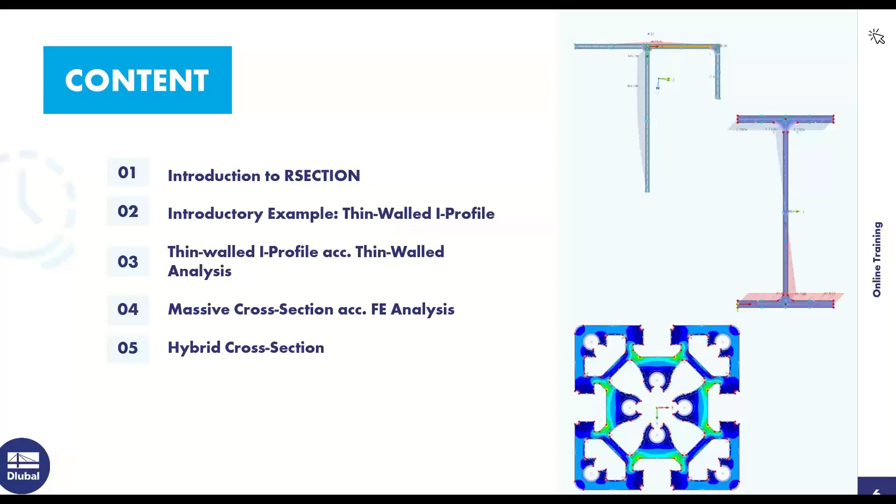Okay, then I will show you the RSECTION interface. RSECTION is an independently executable program for generating any thin-walled or massive cross-sections. If you want to design special cross-sections in RFEM or RSTAB that are not contained in the cross-section library, you can create them with RSECTION. You can then import these user-defined cross-sections into RFEM or RSTAB. In RSECTION, it's possible to calculate cross-section values and stresses.

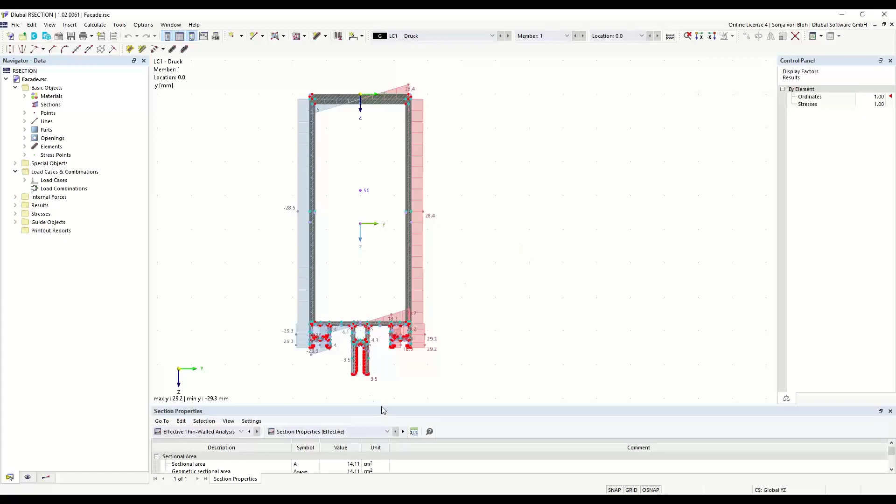The RSECTION user interface is the same as in RFEM 6 or RSTAB 9. The cross-section graphics and dialogs are displayed in the working window here. Most tasks can be performed with the mouse. In the table here at the bottom, the keyboard is primarily used for numeric input, and you will also find the output of the calculated results. Here on the left, you see 3 navigators: the Data navigator, the Display navigator, and the Results navigator.

The Data navigator manages the input data. If I open this tree here and double-click on an object, maybe here the points, it opens the corresponding dialog in which the selected object can be changed. However, it's also possible to create new objects. If you right-click on an object, you will find here the corresponding functions.

Then I will go to the Display navigator. The Display navigator controls the graphical display in the working window. If the checkbox in front of an entry is unchecked, this object is hidden in the graphic. If I uncheck the points here, then you will see the points are not displayed in the graphic anymore. Then I would show you the Results navigator. The Results navigator controls which results are displayed. You can switch here between ordinates, stresses, and so on.

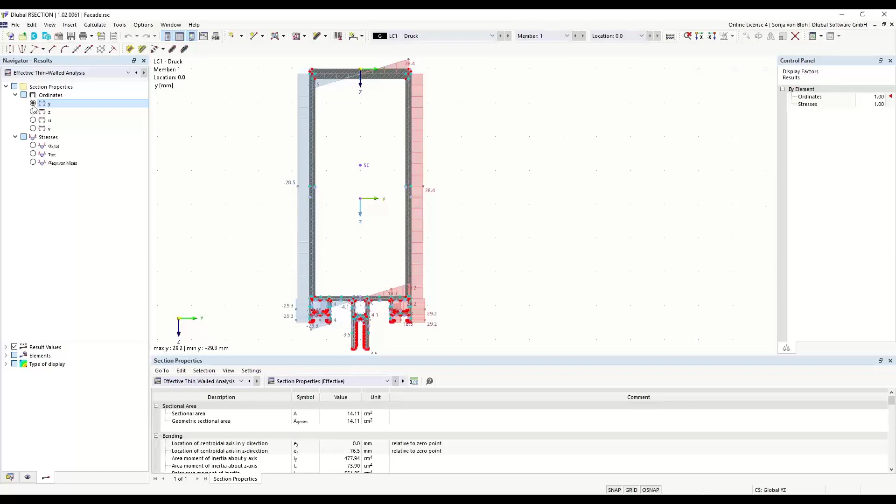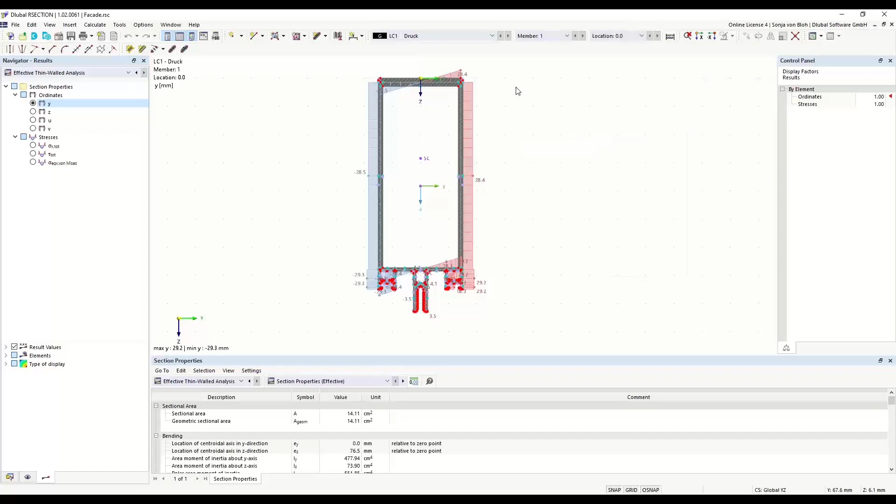Then I would like to go into the mouse functions. To move the section, you can hold down the mouse wheel and move the section accordingly. You can turn the mouse wheel to zoom in or to zoom out. Then you can right-click to open the context menu. You can also select objects with the mouse. If you open a window from left to right, everything that is completely within the selection area will be selected. Here, these objects were completely in the selection area, so they are now selected, which you can see here with this yellow color.

If you drag a window from right to left, everything that is intersected by the selection area will be selected. You can see here now that also this part is selected because it was intersected by this window.

You can also select individual objects. To do this, left click on the objects to be selected. Here I want to select this point, so I have to left click on it. And if I want to add another object to the selection, I have to hold down the Control key, and then you can see here the mouse pointer shows a plus, and then I can select the other object.

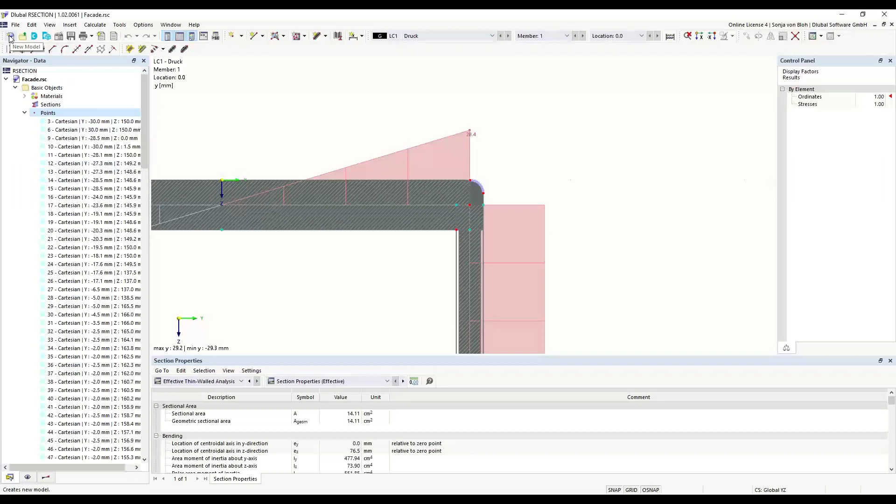This brings me to the first example. To create a custom cross-section, I have to create a new file, and I will do this via this button, New Model. And then I first have to enter the cross-section name, and I name it Example 1.

Furthermore, the analysis method must be defined. I have here two possibilities: the finite element analysis and the thin-walled analysis. I choose the thin-walled analysis in this case. The effective cross-section can be calculated for both analysis methods.

After activating the option effective section, the standard must be selected, and here several standards are implemented: Eurocode 3 Part 1.1, Eurocode 3 Part 1.3 for cold-formed sections, and Eurocode 9 for aluminum sections.

I choose this standard, Eurocode 3 Part 1.1, and according to the rules described in the standard, the subpanels are generated and the effective cross-section is calculated.

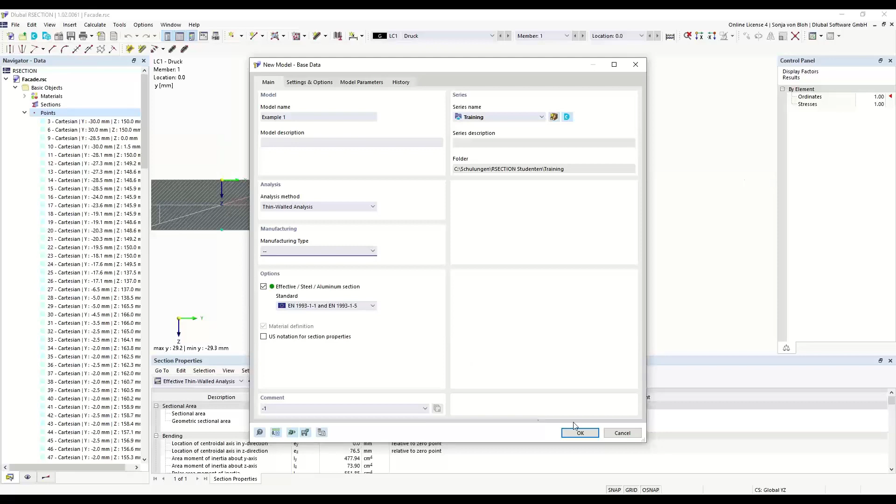In the steel add-on, the manufacturing type, which you can see here, determines which part of the standard is used for the design. For a cold-formed cross-section, the standard Eurocode 3 Part 1.3 is used, and for hot-rolled or welded sections, Eurocode 3 Part 1.1 is used. I don't define a manufacturing type in this case. Then I click on OK, and a new file will be created.

And first I define the material. Here already two materials are defined. If I double click on it, I open the Edit Material dialog. If no materials are defined, it's also possible to right click on Material and create a new material. Okay, I open this dialog again.

I can create a new material in the list via the button Create New Material, or it's also possible to copy selected materials. If I click on the button User-Defined Name, I can enter a name directly, and RSECTION, if I type in this name, lists all materials that match that name. But it's also possible to open the material library via this button, and I will do this in this case.

In the material library, filters are available on the left to quickly find the material. Here I can choose steel, then on the right all steel materials are listed. A search is also available, in which I can search for a material, and I search here for S355. Then I choose this standard and this material, and I click on OK.

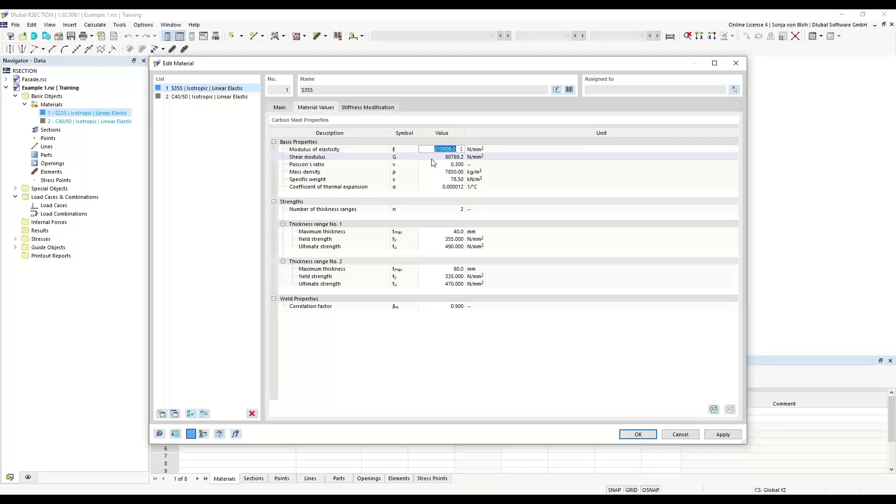If the material is not in the material library, I can create this material. If I activate the checkbox User-Defined Material, it's possible in the following tabs to define the properties that I want to use. I don't do this today, so I deactivate this option again, and then I click on OK.

I then create the elements. The definition of elements is required if the analysis method, analysis of thin-walled structures, is selected, or if the effective cross-section is to be calculated. An element must always lie in an area, and this area is called an RSECTION part.

Elements can be created graphically or via a dialog. The graphical input is called up via the symbols that you can find here. And the input via a dialog is called up via this navigator data. Here you can create a new element.

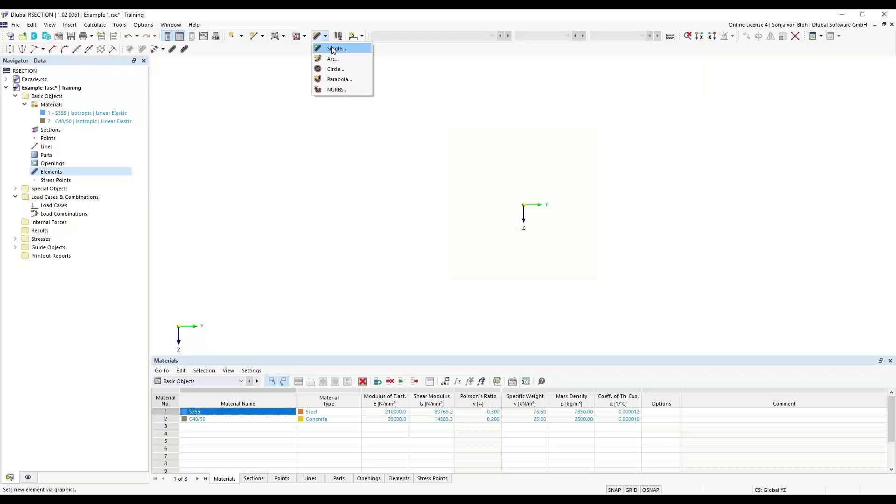When creating an element via the graphical input, the part is also created. When creating an element via the dialog box, the parts and the points of the element must be created beforehand. That's why I can't choose this dialog now, because I haven't created the points before. So I choose this function for the creation of elements. Here I choose single.

I enter the bottom flange here first, and for this I use the input mode length and direction, and here I define an angle of 0 degrees, a length of 150 millimeters and a thickness of 10.7 millimeters. Then I can insert this element in the working area graphically, or it's also possible to define here the point coordinates. I put this here on the coordinates 0, 0. And for this, I left click here in the working area.

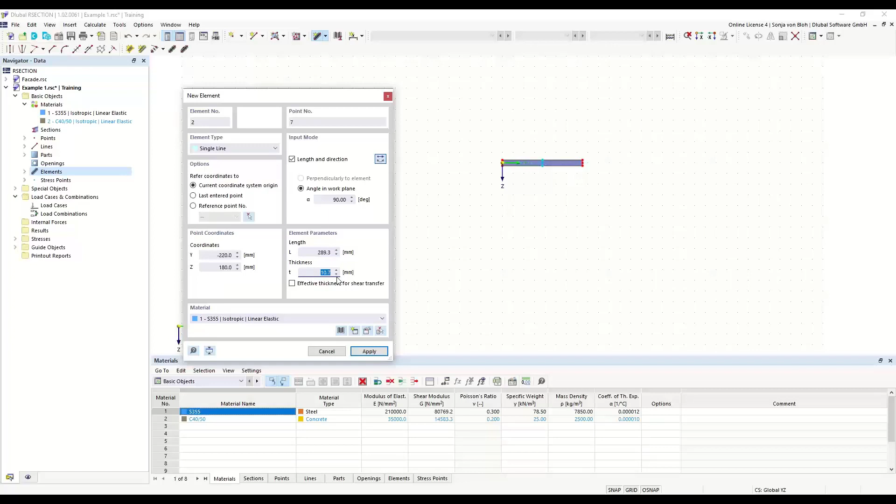Then I create the web. And for this, I use the input mode length and direction again. And here I define an angle of 90 degrees. And you can see here what's happening. And now I reverse the orientation. And I define here a length of 289.3 millimeters and a thickness of 7.1 millimeters. And then I left click here on this node.

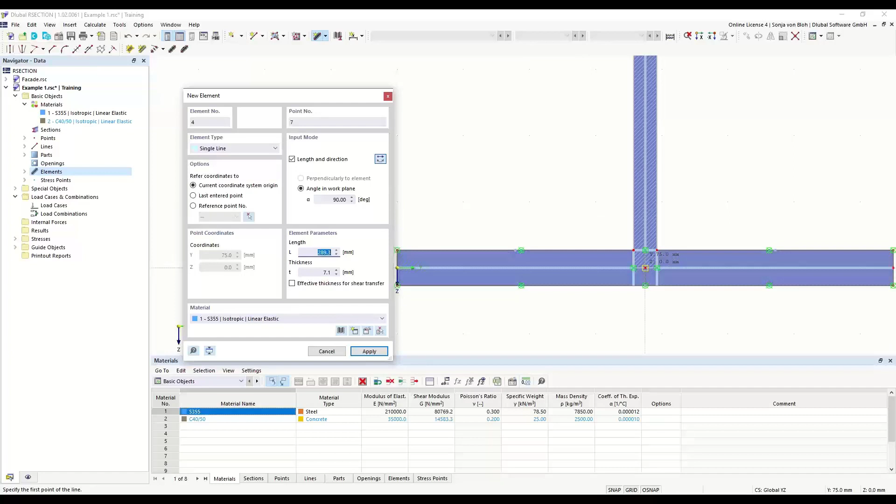Elements must be connected for the calculation of the effective cross-section. The connection is to be made via the start and end points of the elements. If two elements share the same points, they are connected. I have now here this element, and they share here this point, so they are connected.

Then I create the left flange. For this, I use here the length and direction input mode again. And here I define an angle of 0 degrees, a length of 75 millimeters and a thickness of 10.7 millimeters. And then I left click here on this point. Then I reverse the orientation again, and I left click on this point again. Okay.

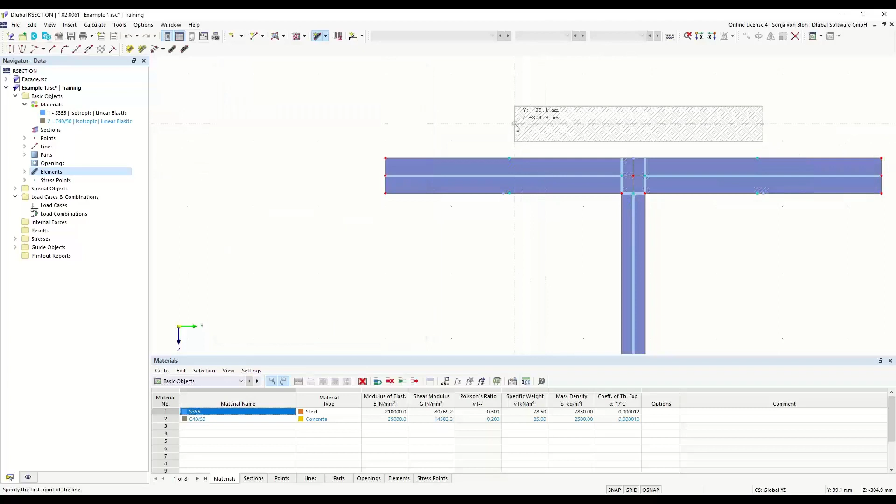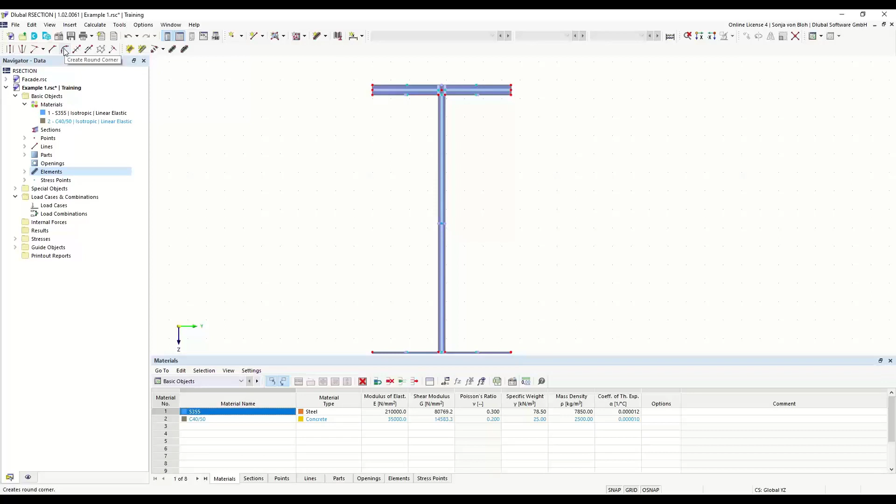The cross-section should be a rolled T cross-section to which a lower flange is welded. The round radius is 15 millimeters. I can define lines to create them or use a function that's called create round corners. I find this function here, create round corners, and I click on it, and then I define a round radius of 15 millimeters, and then I have to left click here on the corresponding lines. And if I right click, I close the dialog.

Then I have to define the welds. So for this, I use the function create angled corner. And here you have two corner types, both edges and edge and angle. And I choose here the edge and angle corner type. The lower flange is welded with a 6 millimeter double fillet weld.

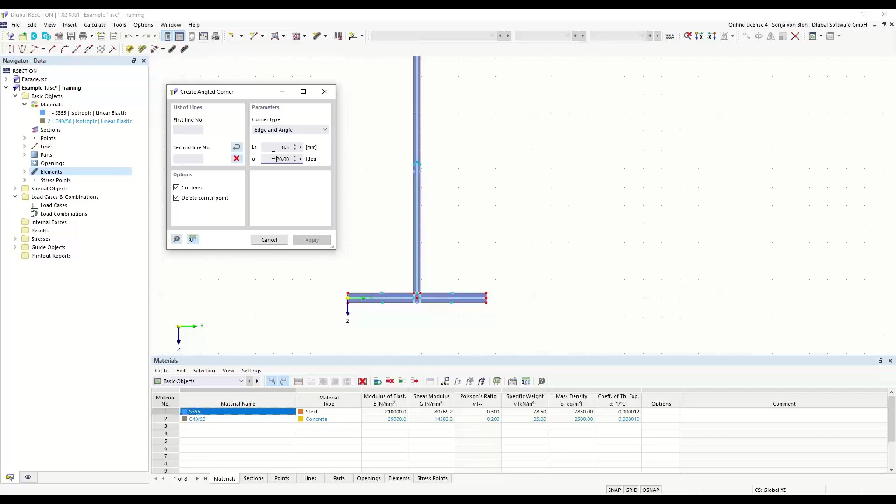I can type in here the length, or it's also possible to calculate it in this dialog. So I define here 6 multiplied by the square root of 2. And then I have to define the angle, and the angle is 45 degrees. Then I have to click on the corresponding lines. And now my welds are created.

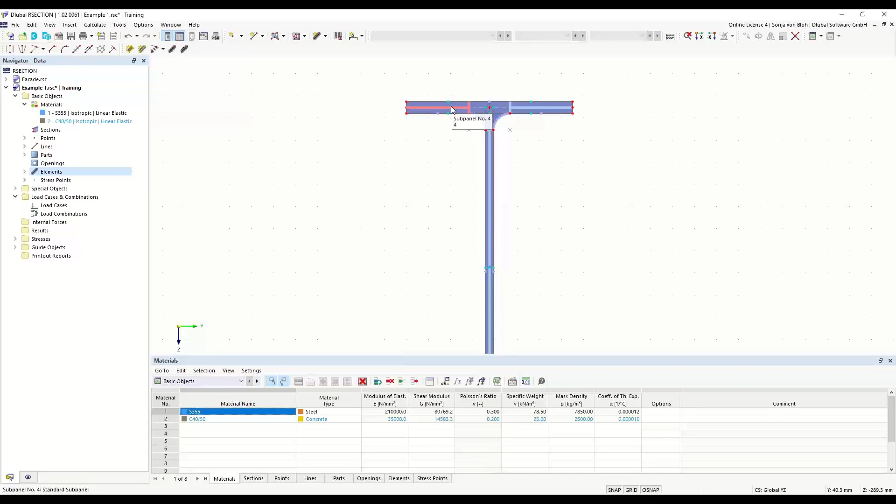What you can see here are the sub-panels, and these sub-panels are automatically generated based on the standard selected in the base data dialog, and these cannot be changed. If no elements are defined, the cross-section classification in RSECTION and the design in the design modules of RFEM or RSTAB is not possible. And it's also not possible to do a calculation of the effective cross-section if no elements and no sub-panels are defined. In the design add-ons of RFEM or RSTAB, like steel design, the cross-section is then designed according to cross-section class 3.

I would also like to use this example to show you how to calculate stresses and the effective cross-section. In order to calculate stresses or the effective cross-section, a load case must first be created. Load combinations can also be created, and I create a load case now. And I do this via the navigator data. For this, I right-click on the load case, and then I choose a new load case.

Then I can define a load case name if I want to, and I name it N, and then I create a second load case via this button here, create new load case, and I give the load case the name M. Then I define a load combination via this button. And here I assign these two load cases for the load combination. It's also possible to define here a factor if I want to. And here it's also possible to rename that load combination, and I name it N plus M. And then I click on OK.

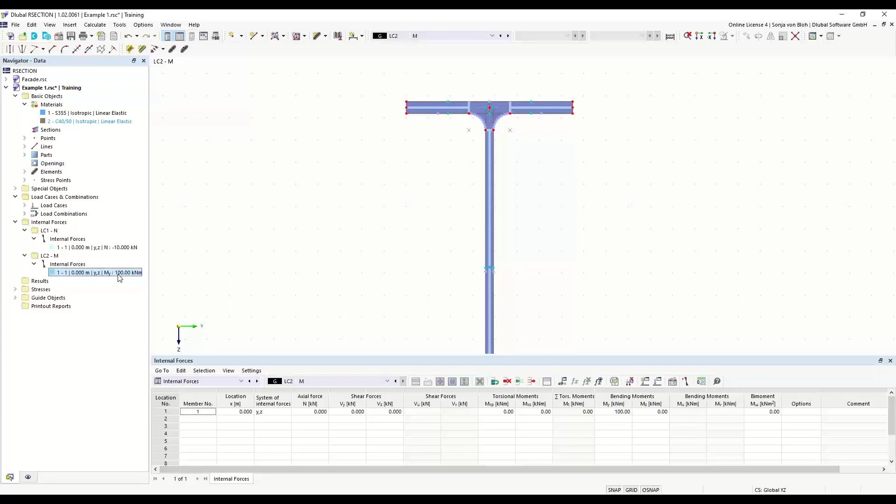Here I click on Apply and Next, and then I change the load case to load case number 2. And here I don't want to define an axial force, so I set it to 0, and I want to define a bending moment about the y-axis of 100 kilonewton meter, and then I click on OK. In the navigator data, you can now see that in load case 1 an axial force of minus 10 kilonewton is defined, and in load case number 2, a bending moment of 100 kilonewton meter is defined.

The blue dots that you can see here on the graphic are the stress points. Stresses are calculated and displayed at the stress points. The stress points are generated automatically. Stress points can also be defined manually, and I want to do that here. So I go to the navigator data again, and then I go to stress points. I right click on stress points and choose new stress point. Then I can define the point number if I want to.

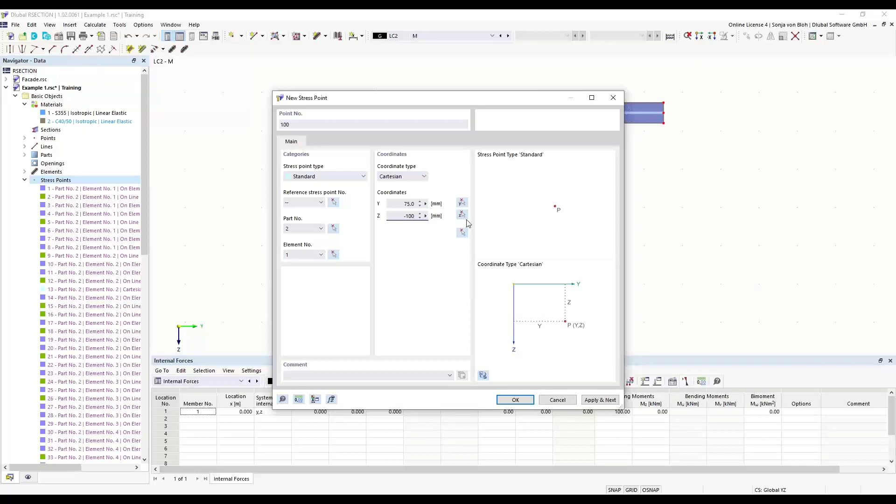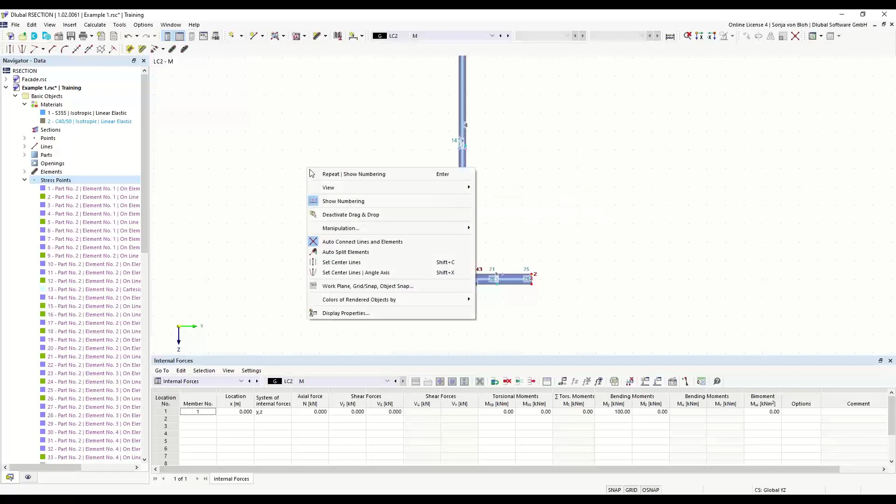I define here 100, and then I have to define the coordinates: Y 75 millimeter and Z minus 100 millimeter. And then I click on OK, and the stress point will be generated. You can see it if you go with your mouse over the stress point. It's also possible to show the numbering. You can right click here and choose show numbering. Then you can see, okay, this is stress point 100. I deactivate this numbering again.

It's also possible to show the numbering via the navigator display. Here you have this checkbox numbering, and here you can select or deselect the display of points, lines, and so on if you want to. Which stresses are to be calculated and output in tabular and graphical form can be set in the stress configuration. I will show you this now. For this, I go to the navigator data again, then to stresses, stress configuration, and I double click on the stress configuration, and the corresponding checkboxes are to be activated or deactivated here. If I click on this entry, then you get information on how the stress is calculated. Then I click here on OK.

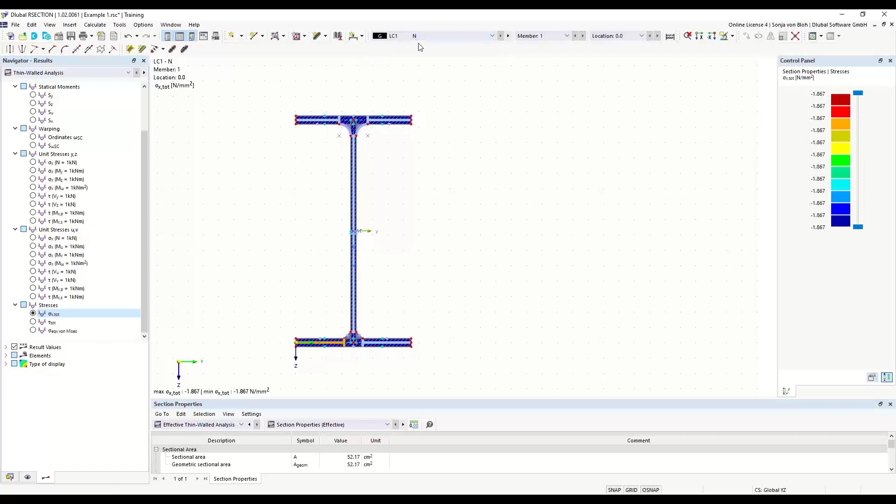I start the calculation now. And in the result navigator here, you can switch between the results of the gross cross-section. That's here the thin-walled analysis. I can show you here the stresses, and this is for load case number 2, and you can switch here also. You can see the stresses from load case number 1 or from the load combination. I choose here load case 1. There was an axial force defined, and it's also possible to change the type of display. Here I choose off.

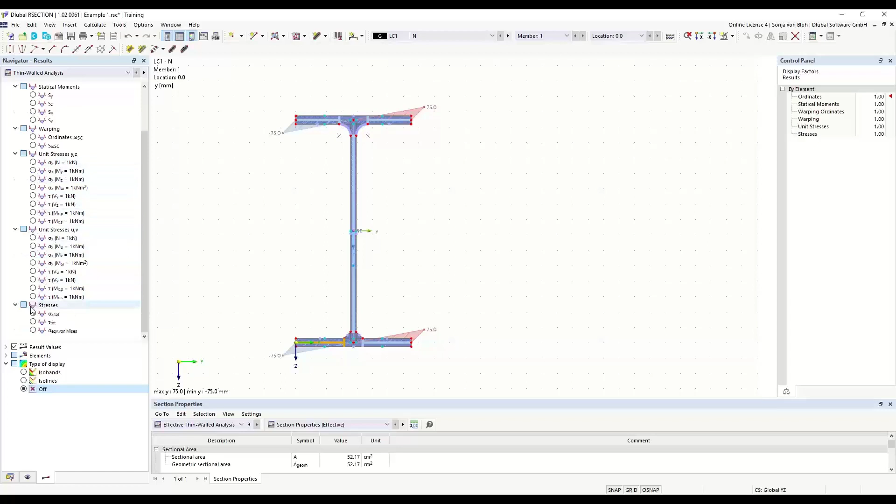It's also possible to show the different section properties. You can show the statical moments, or the ordinates, or unit stresses, or the stresses. Then it's also possible to show the effective thin-walled, the effective cross-section, and you can see in the graphic in the working window that this cross-section falls into class 4. Here this cross-section is reduced. According to the standard, the reduction in strength due to local buckling can be taken into account through effective width, and this is implemented in RSECTION. It's also possible to display or to control the section properties in numerical form.

For this, you have here also the possibility to show the section properties of the gross cross-section. For this, you have to choose thin wall analysis, and then you have the possibility to show the section properties via this drop down. Here you can see the sectional area calculated for the cross-section, and the area moment of inertia about the y-axis and z-axis and so on.

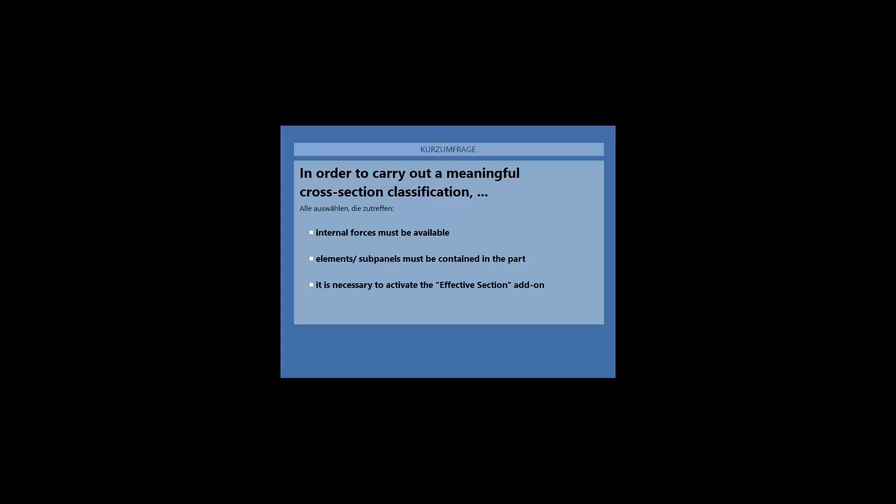Okay, I will now show you the results. For a classification, internal forces must be defined, elements must be defined, and it's necessary to activate the effective section add-on.

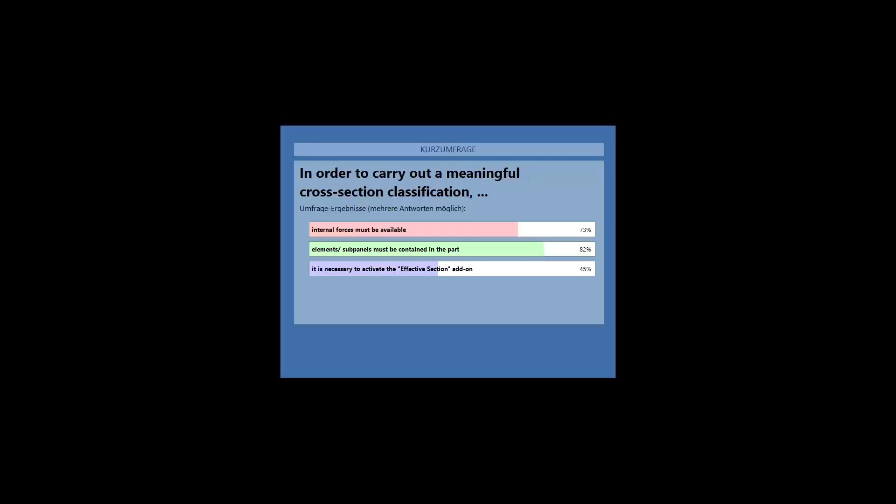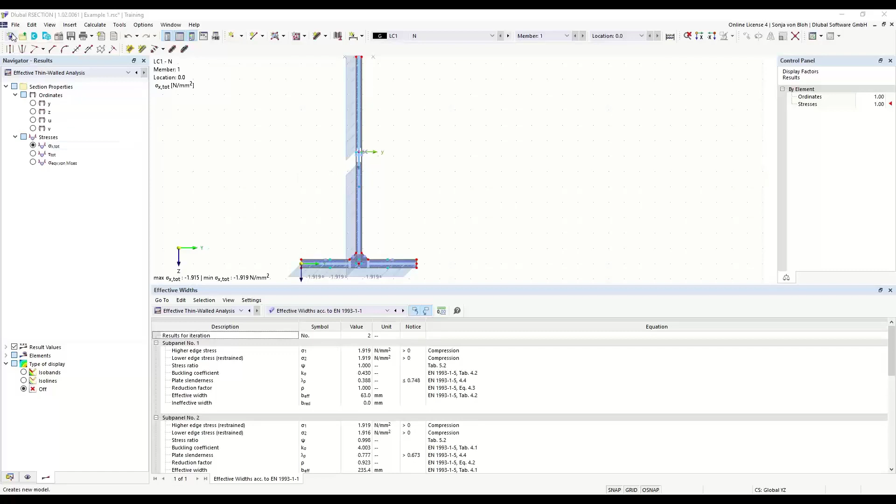Okay, I would now like to use another example to show you how you can access cross-sections from the library and modify them. For this, I create a new file. I click here on new file and name it example 2.

I choose the analysis method thin wall analysis, and I choose here also the option effective section and the standard EC3 part 1.1. And I click on OK.

I define the material first. For this, I modify this material.

This is the material that I wanted to use, but I show you the material library again. I can click on this button, import from material library, and then I search for the material that I want to use. It's an S235. I choose this material, click on OK, and OK.

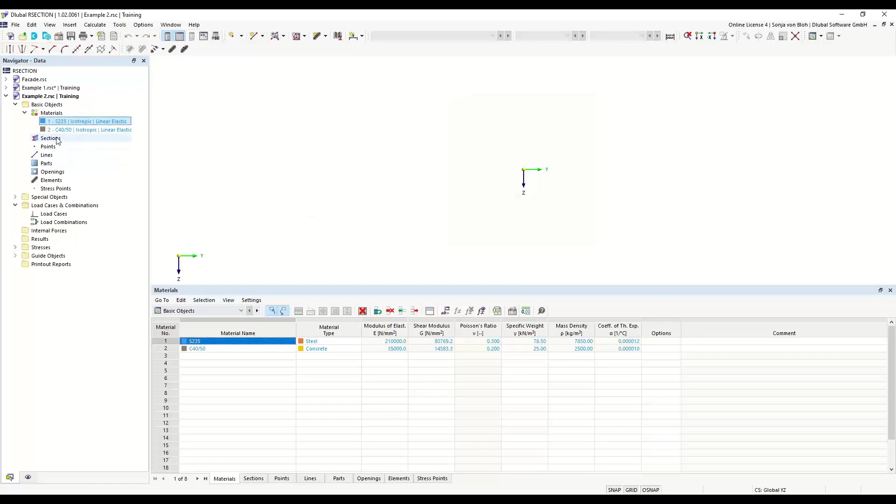And then I insert a cross-section from the cross-section library. To do this, I right-click here in Navigator on the tree section and choose New Section.

The window is structured like the material window. A cross-section can be created here via this button, Create New Cross-Section. It's also possible to copy a selected section, and also possible to type in here the name of the cross-section.

Maybe here IPE 200. And then all cross-sections that match with the name are listed here in the list. It's also possible to open the cross-section library via this button here, Import Section from Library.

And then I have to select the section from the library. And here I choose the L section. Here again, the cross-section library is structured in the same way like the material library.

You have here filters on the left, where you can filter by manufacturer, for example. And it's also possible to search for a cross-section.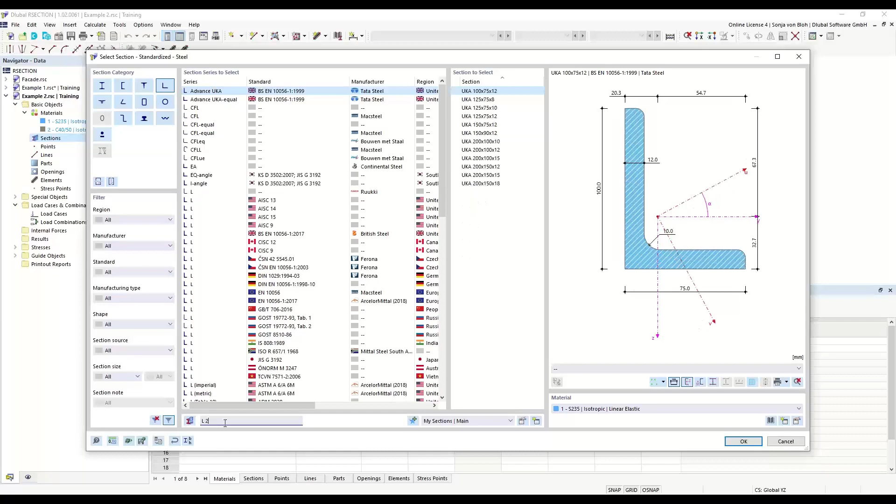And here I type in L 200, 150, 200 - 0 was missing, 150, and 12. And here I choose this standard, and then this section, and I click on OK.

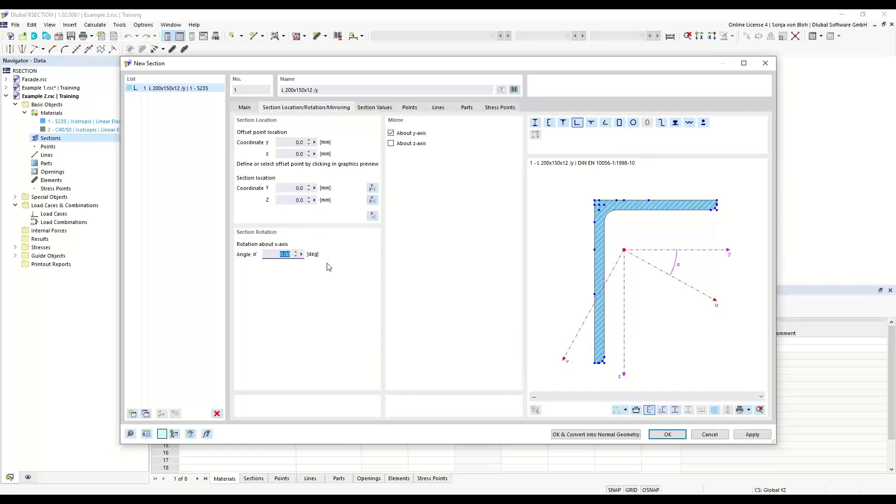The angle should be mirrored around the y-axis. So I activate the checkbox about y-axis, and the section should be rotated by 90 degrees. So I type in here 90 degrees.

Furthermore, I select here the offset point in the graphic, and this is this point. At this point, the cross-section is placed at the insertion point, and the insertion point I can define manually here in these boxes, or it's also possible to pick this in the working window. I will do this. I pick here the 0, 0, and then I click on OK.

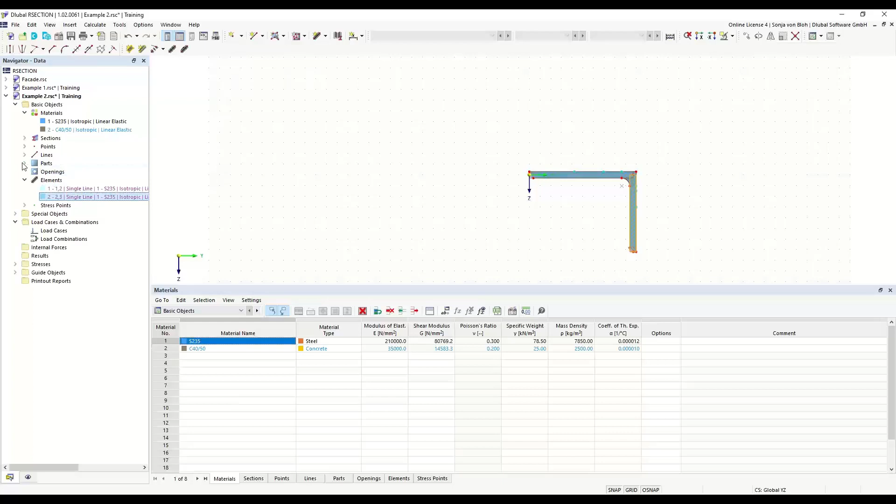When inserting this thin-walled cross-section, here 2 elements were defined, and also the part. The cross-section can be subsequently edited.

If I double-click on this cross-section, I open the Edit Section window, and here I can change the section location or the mirroring, and I can also change here the cross-section. I can import another cross-section from the library.

It's also possible to move or mirror this cross-section via these functions: move, copy, or mirror. However, in order to modify individual objects, such as points or lines, the cross-section must be split.

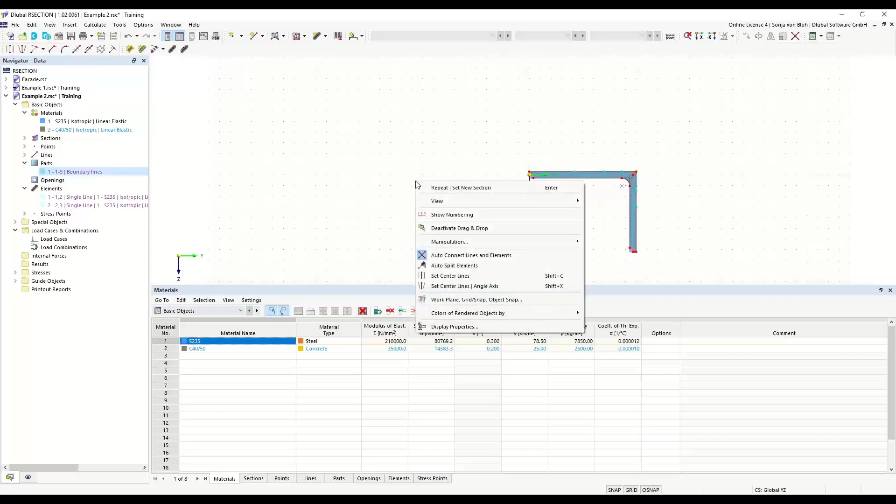The cross-section is to be supplemented by further cross-section parts. I therefore split the cross-section into its individual parts for further processing. And for doing this, I first deactivate here this function auto-split element.

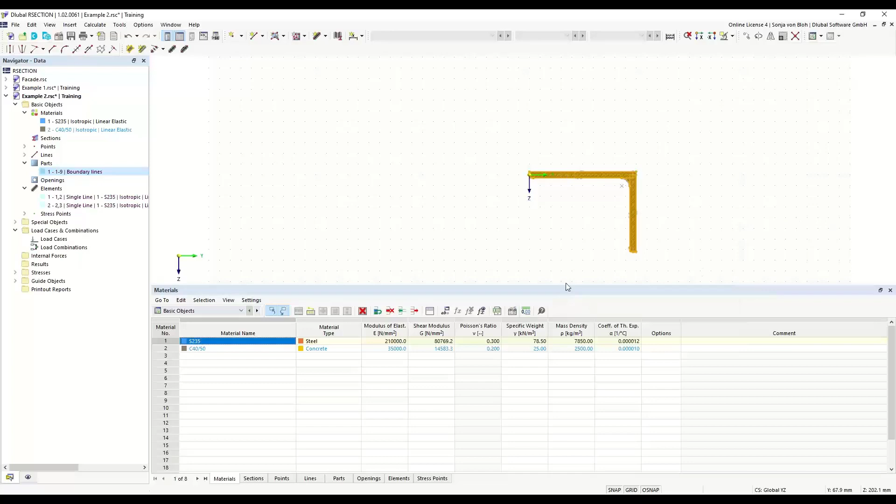And then I right-click on the section and choose here the function convert into normal geometry. Now this cross-section is split into its objects, and the fillet isn't needed,

so I delete this point, and with deleting this point, the fillet is also deleted. And now you can see that the elements are colored in red. And this red color says, okay, there's something wrong.

Here the part is missing. You can see the part was also deleted and elements must lie in a part. So now these elements are shown in red.

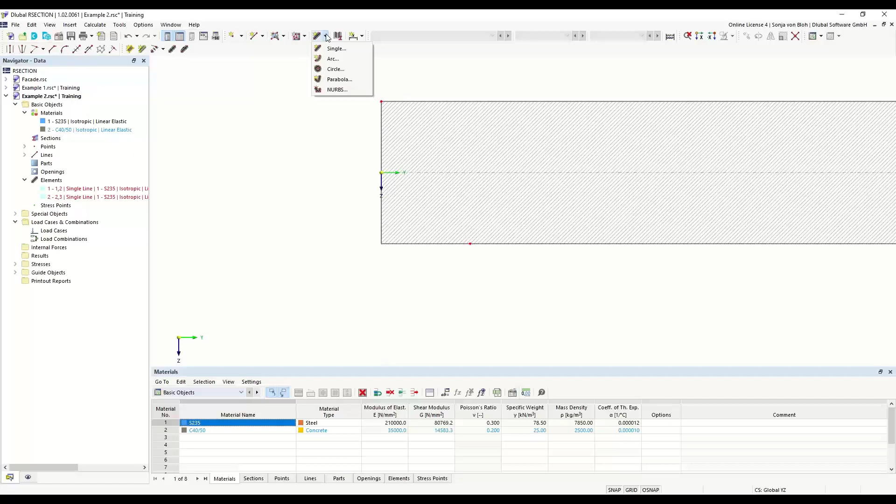I also add more elements via the graphical input. I choose single, and use the input mode length and direction again. Here I define an angle of 0 degrees, a length of 200 millimeters and a thickness of 12 millimeters. I want to place this here, so I have to reverse the orientation, and then left click here in this working window.

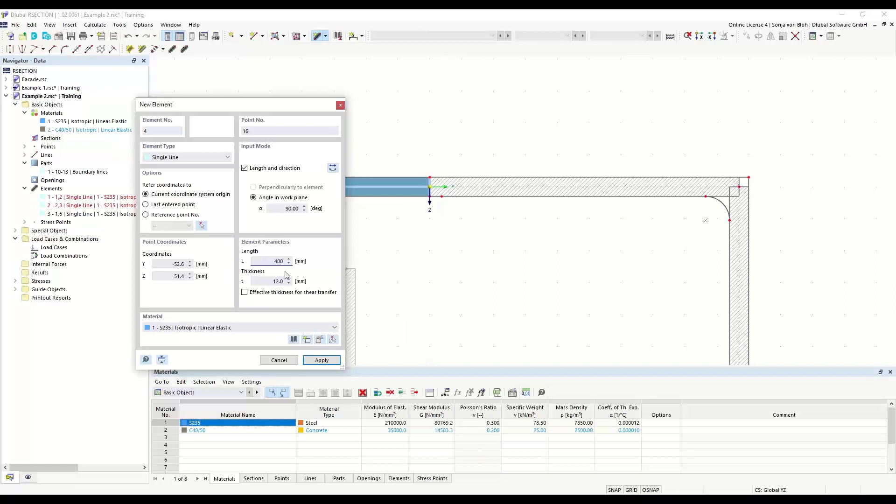Then I add another element with an angle in the work plane of 90 degrees. I have to reverse the orientation again, so I click on this button. Then I define a length of 400 millimeters and a thickness of 12 millimeters, and left click on this point. Then I right click so that this window is closed, and I don't need these lines here.

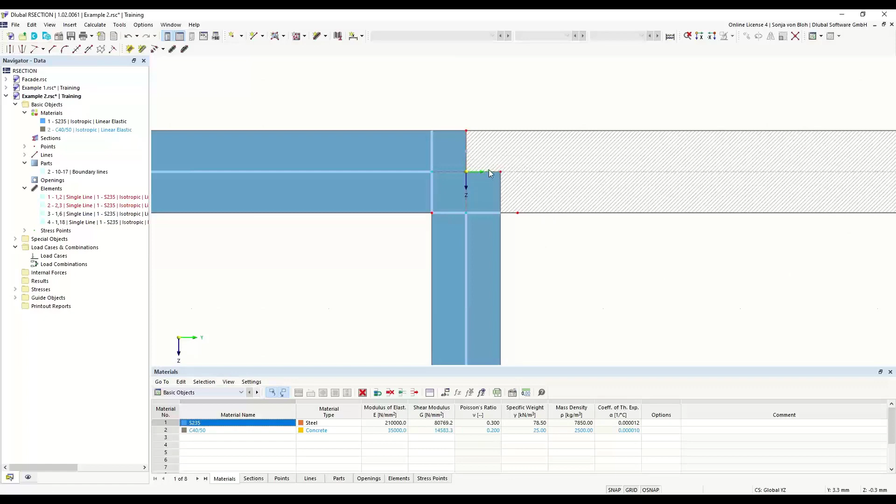So I delete them. I press the delete button. I do this for this line also. Press on delete.

Welding seams should also be taken into account in the cross-section properties, and I create the weld seams using the angle corner function that I've shown you before in another example. So I click on the button create angled corner. I use the corner type edge and angle again, and here a 6 millimeter double fillet weld is to be defined, so I define 6 multiplied by square root of 2, and an angle of 45 degrees, and then I click on the corresponding lines.

Furthermore, I still have to create the part by selecting the relevant lines, and for this I use the function you can find here, select boundary. Here I have to define the material for the part, then I click OK, and then I click on the line, and the part is created. What you can see here, now the red color for the elements is gone, because now the part necessary for the elements is created.

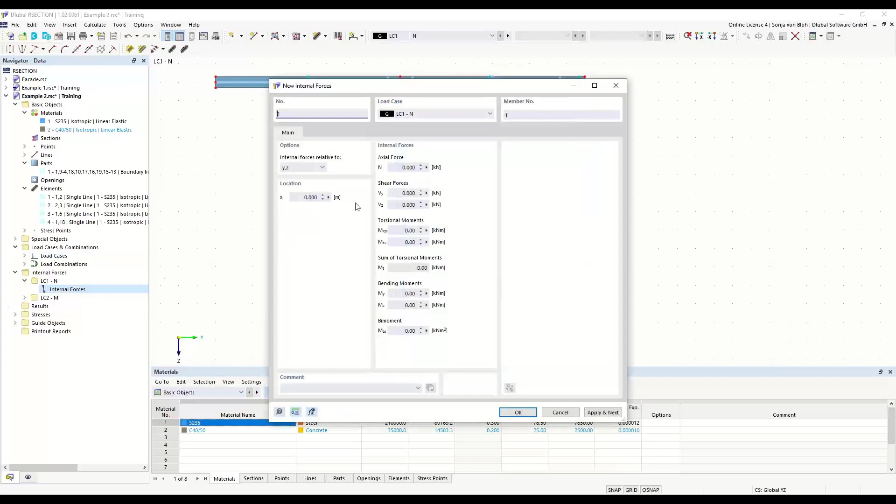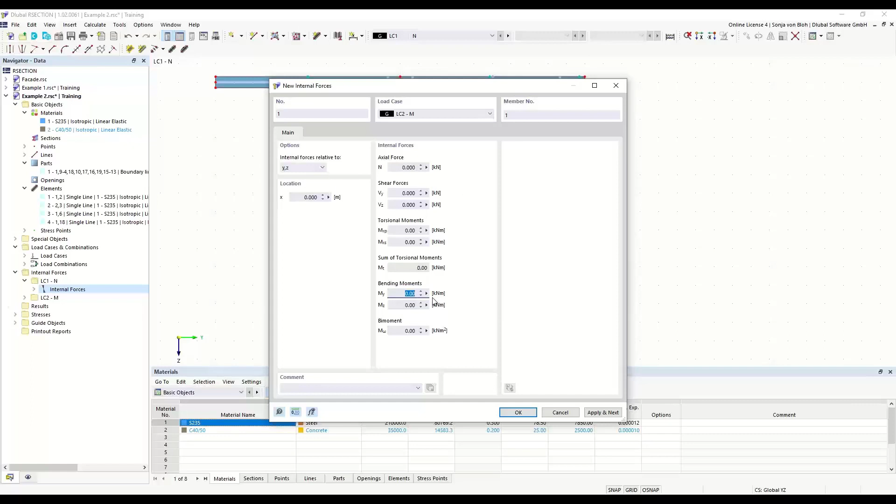Then I have to define the internal forces. For this, I double click on internal forces, and define an axial force of minus 50 kilonewton for load case N. Apply and next. Then I change to load case 2, and define an axial force of 0 kilonewton and a bending moment of 20 kilonewton meter. Click OK. I start the calculation now.

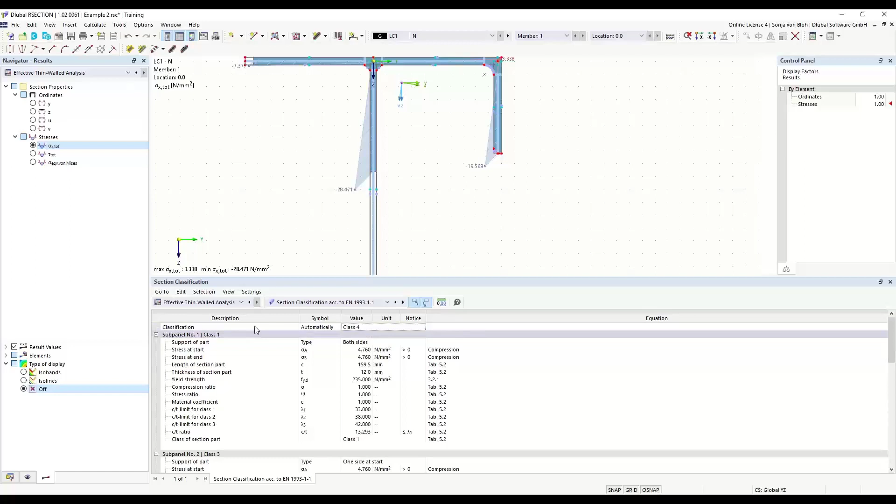I can see here the effective cross-section. I change the type of display to off, and I want to see the stresses. And I see now the reduction due to the class 4 cross-section. I can control this in numerical form, section classification - okay, it's class 4. And I can see here also the calculated reduction.

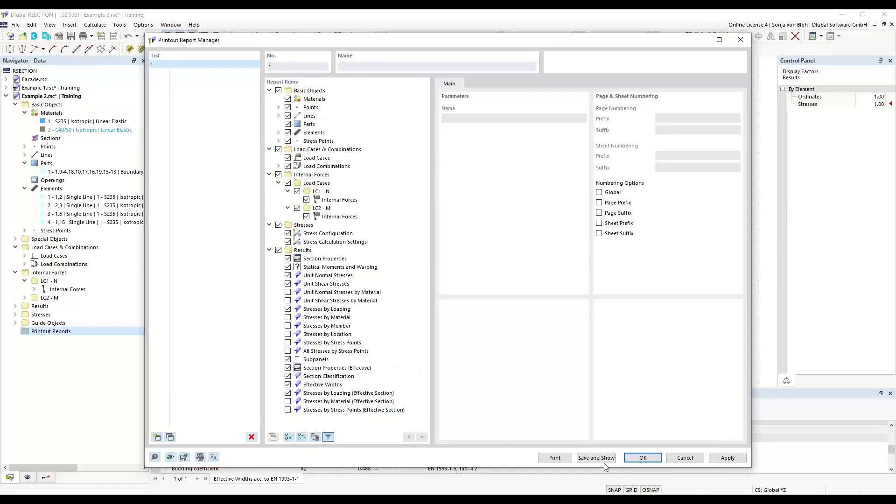I want to create a printout for the documentation, so I go to Navigator Data again. Then I right-click on the printout report and choose New Printout Report. Then I can choose the report items. I don't want to have the stresses by material, by member, location, stress points, or stresses by stress points here. And I don't want to see the stresses by loading and material here. Then I click Save and Show, and the printout will be generated.

You can see it here. It's also possible to add a graphic to this printout. For this, I go to this button here, print graphics to the printout, and maybe I can change the representation a little bit. Maybe I can add all values, and I want to tilt the result diagram into the work plane.

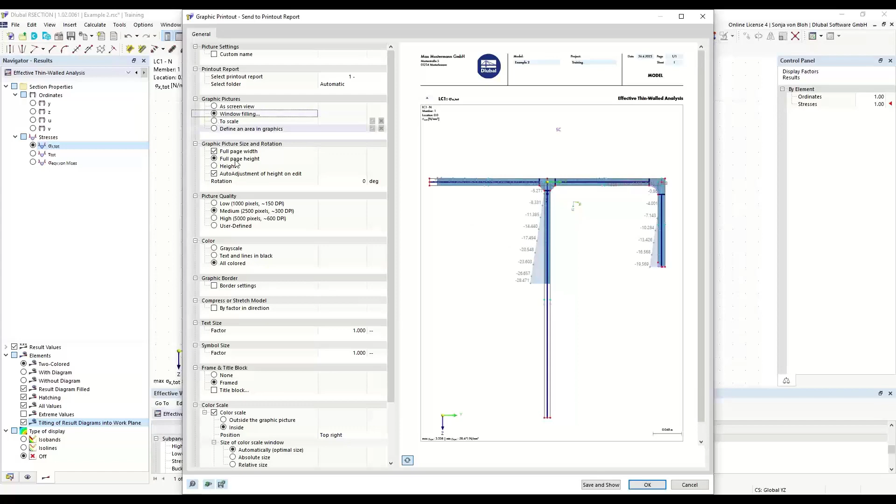And then I choose print graphics to the printout report again. Here it's also possible to influence the size of the picture. I can choose window filling, then it's much bigger. Then I click Save and Show, and this graphic will be added to the printout.

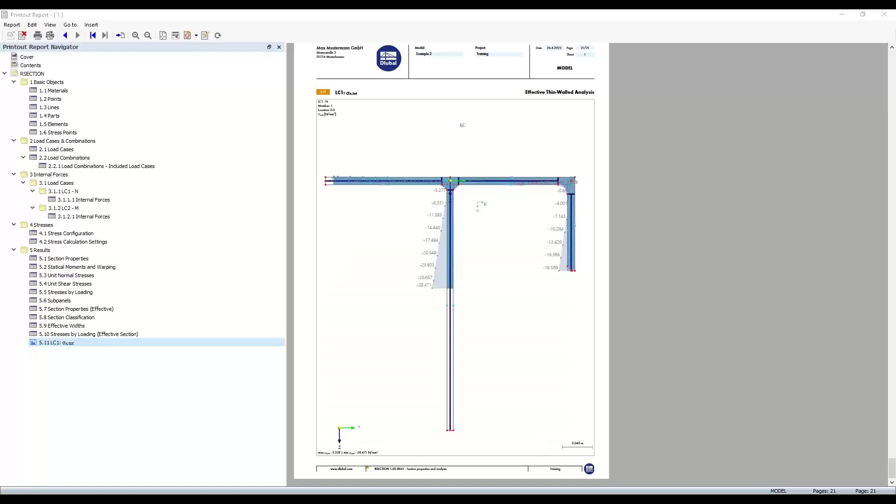In my first example, I show my screen again, and I close the printout report, and go to my first example again. I forgot to show you how to display the stresses on certain stress points.

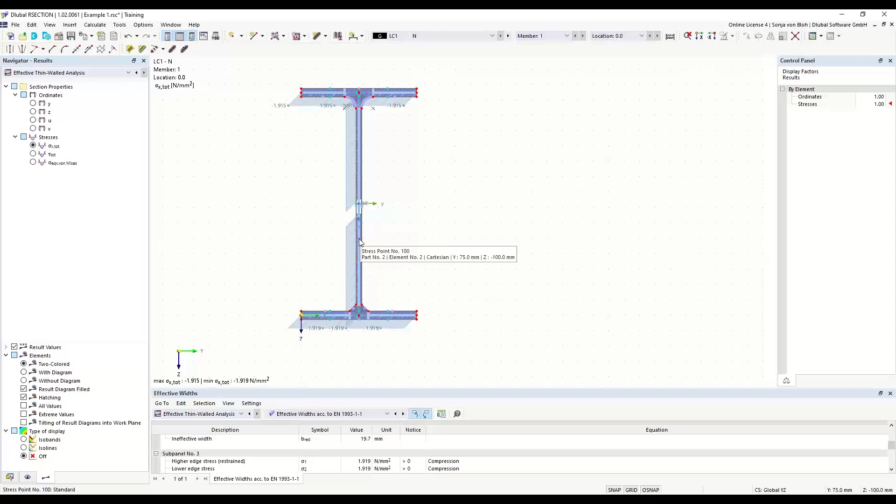For this, you remember we have created stress point number 100, and if you want to see the stresses on stress point number 100 in the table, you have to choose the table stresses, then click onto the stress point, and now you see the stresses here on this stress point. I forgot to show you this.

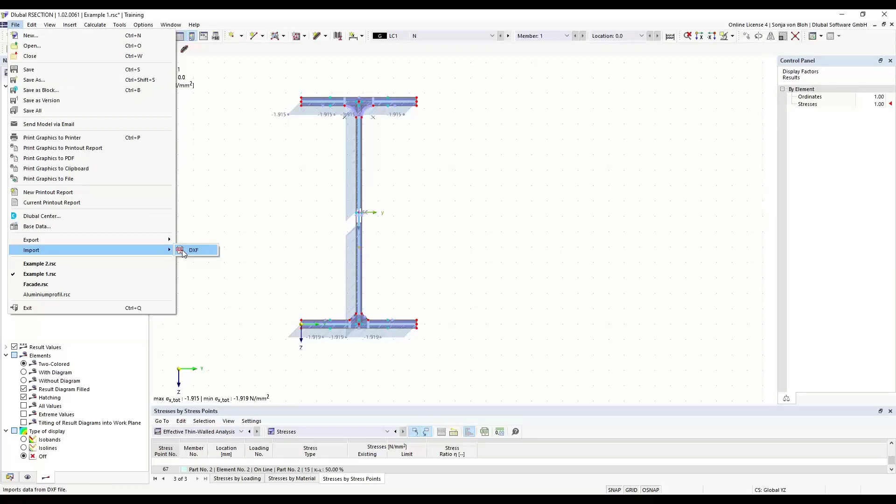In the next example, I would like to show you that you can also create cross-sections by importing a DXF file. A DXF file can be imported via menu File, Import DXF. Then you have to choose the corresponding DXF file and click on Open.

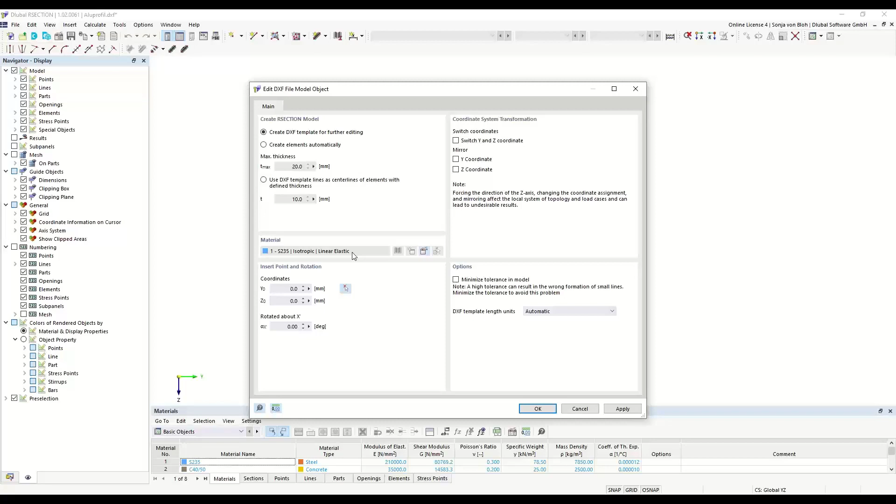The function 'create DXF template' is useful for massive cross-sections where no elements need to be created. It can also be used for complex cross-sections where I only want to create elements for the decisive cross-section parts. With this import function, the lines in the DXF file are imported as lines.

I use this function now, so I click on OK, and now the cross-section is imported.

First I define the material for this cross-section. I go to the Navigator data again, click on materials, double click on this material, and I want to choose an aluminum material from the material library.

I open the material library again, and then I can choose aluminum, and here I search for EN 6060, and then I choose this material and click on OK.

I open the base data, and here I have to choose the analysis method, and a finite element analysis is to be carried out for this cross-section. So I choose here the finite element analysis.

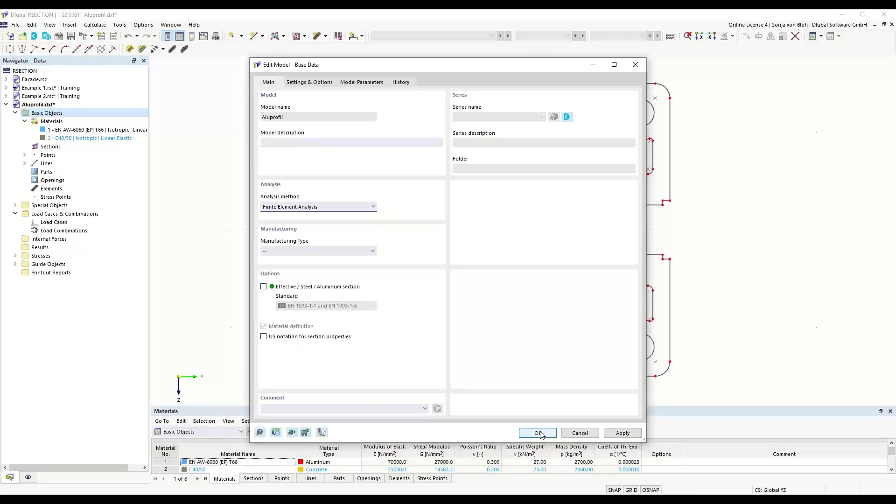Finite element analysis should be performed on massive cross-sections such as timber or concrete cross-sections, in contrast to thin-walled cross-sections, where the stresses can be regarded as constant across the cross-section thickness. The stress distribution in massive cross-sections is variable, and this can only be determined with a finite element analysis. So I choose this analysis method and click on OK.

In a finite element analysis, only a part needs to be defined. It's not necessary to define elements. So I define now this part, and for this I use the function select boundary.

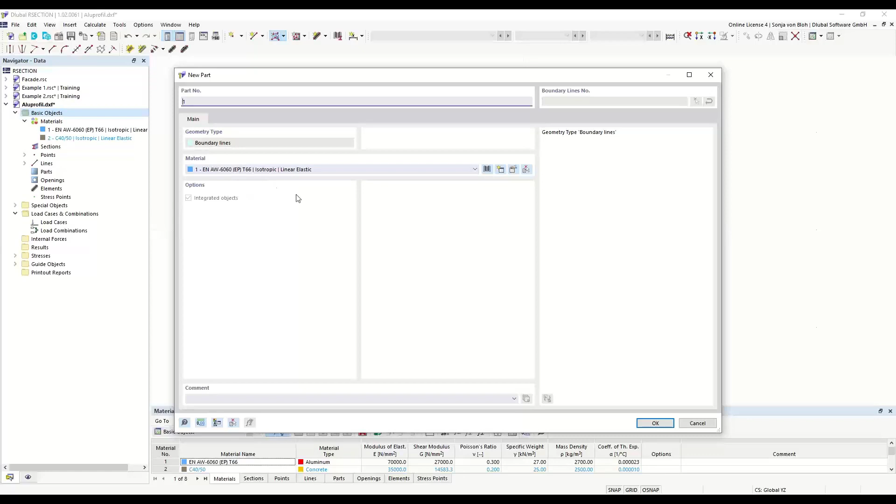Then I choose here the material EN AW 6060, click on OK, then I choose the line, and the part will be created.

After creating the part, I still need to create the openings. I use also here the function select boundary for openings, and then I choose the corresponding lines.

I want to show you that you can also create openings with the function rotating. So I now select the opening that I want to rotate and copy, and then I select the function rotate selected objects.

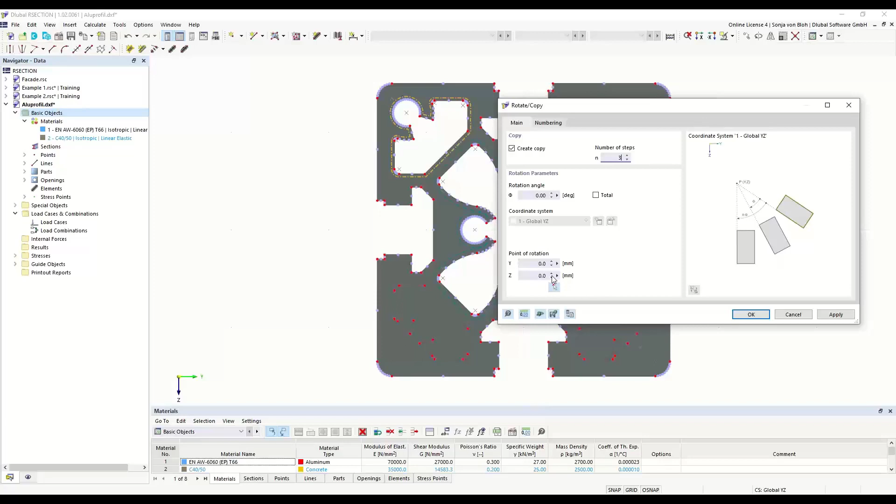Because I want to create this opening, I activate the checkbox create copy. I want to have 3 copies, and then I have to define the point of rotation. I can pick it in the work window, and then I click on OK.

Sorry, I forgot to define the rotation angle. This should be 90 degrees. And then I click on OK.

Now the openings are created. I want to calculate the stresses here as well.

So I create a load case, new load case, and I name it N plus MT. Then I click here on OK.

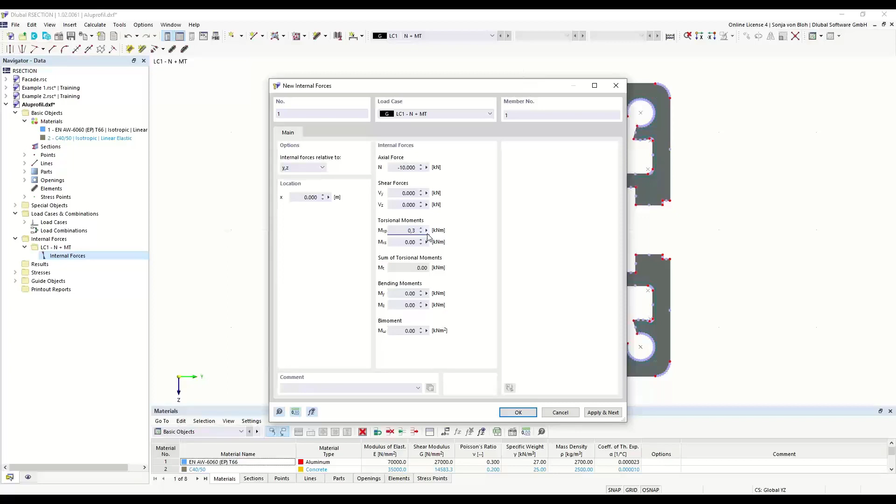Then I have to define the internal forces. Here I define a compressive force of minus 10 kilonewton, and here I define a torsional moment of about 0.3 kilonewton meter. And I click here on OK.

And then I start the calculation.

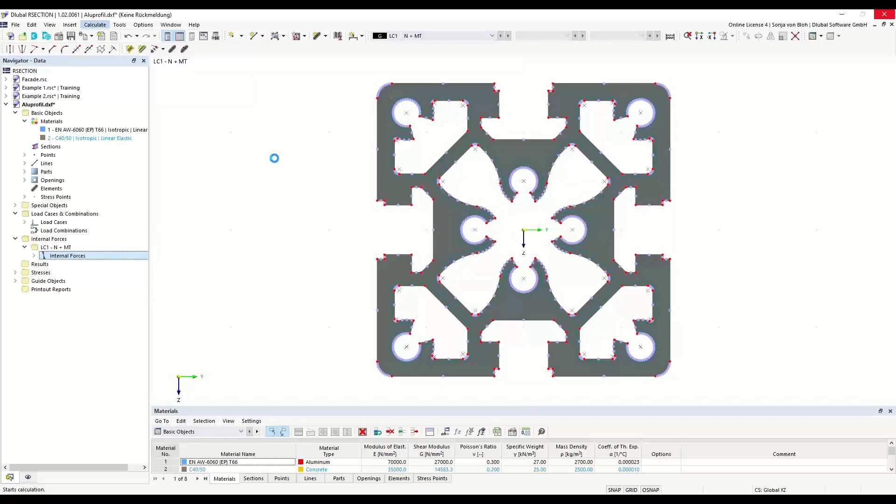Here in the navigator results, I have only the results of the finite element analysis. Here I choose the stresses, the equivalent stresses. And you can see now the graphical results in the working window.

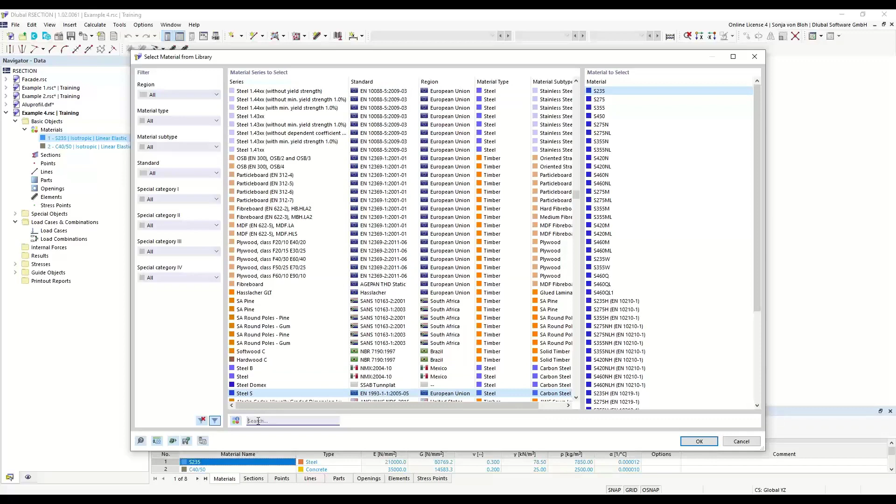Then I have to define the materials. For this I modify the first material, and here I open the material library again, and I want to use a steel material S235. So I choose this material, and for the second material, if you don't have one, I will delete it.

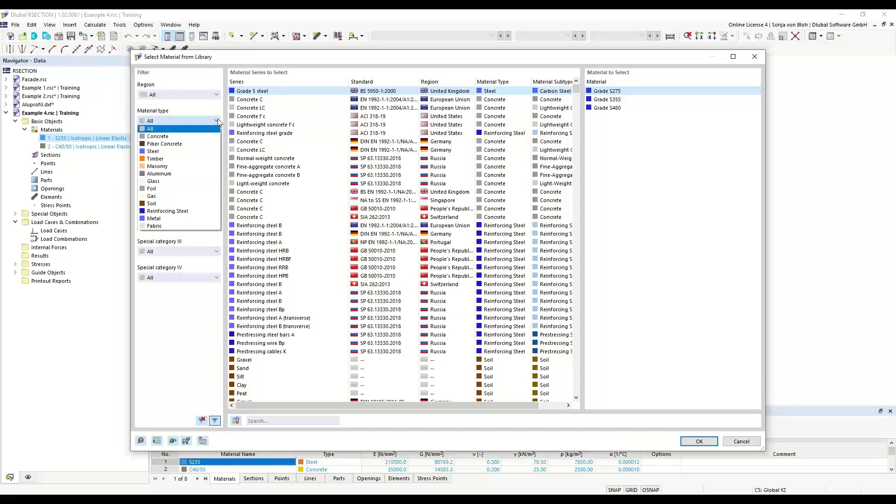If you don't have one, you can create it via this button, create new material, and then you can go to the material library, and then you can choose here concrete for material type, and then I choose here C40/50. I click on OK and OK.

A 1000 millimeter wide and 200 millimeter high concrete cross-section lying on an HEB steel cross-section is to be modeled. So I model the concrete cross-section. For this, I use here this function single element. I use the input mode length and direction,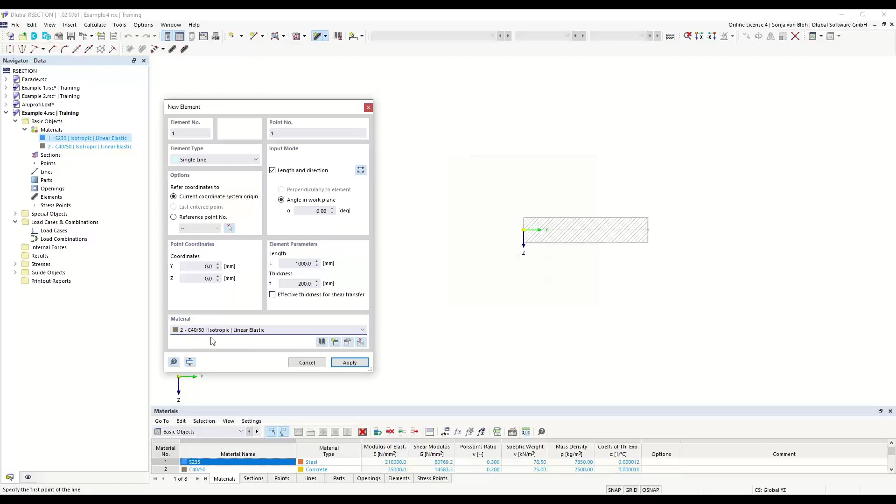and I define here a length of 1000 millimeters and a thickness of 200 millimeters, and I choose here the material 2, the concrete material, and then I add this here in the working window with right click. I close the window, and then I select HEB 400 from the cross-section library. To do this, I right-click here on Section, New Section.

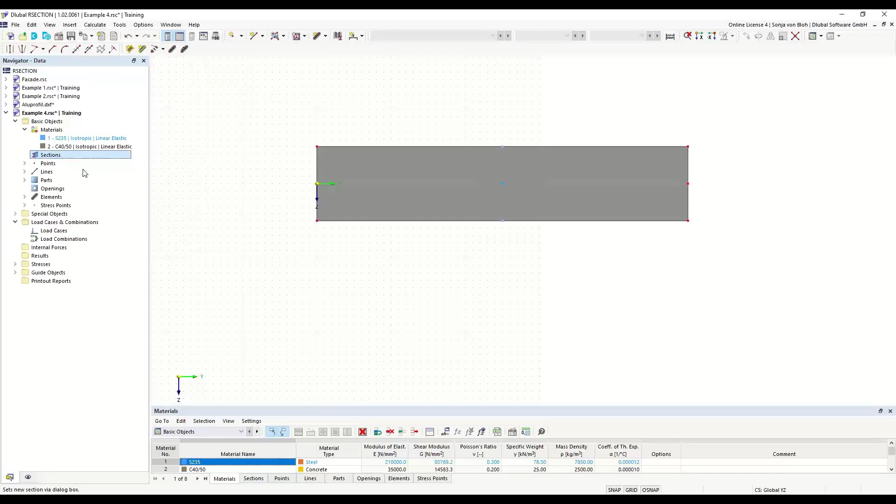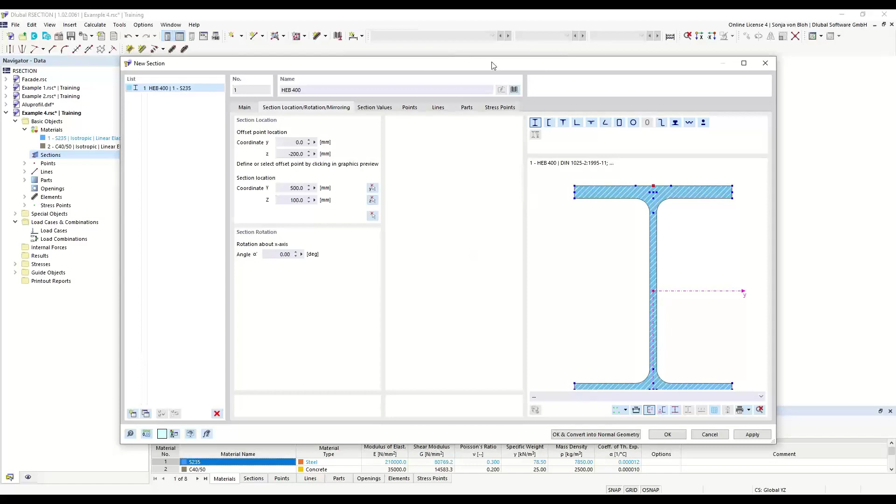I open the section library, choose here I-beams, H-beams, and then I type in HEB. Here I want to use this cross-section, and I choose here the material, the steel material number 1, S235. Click on OK. Then I pick here this point, and I pick here this location, and then I click on OK.

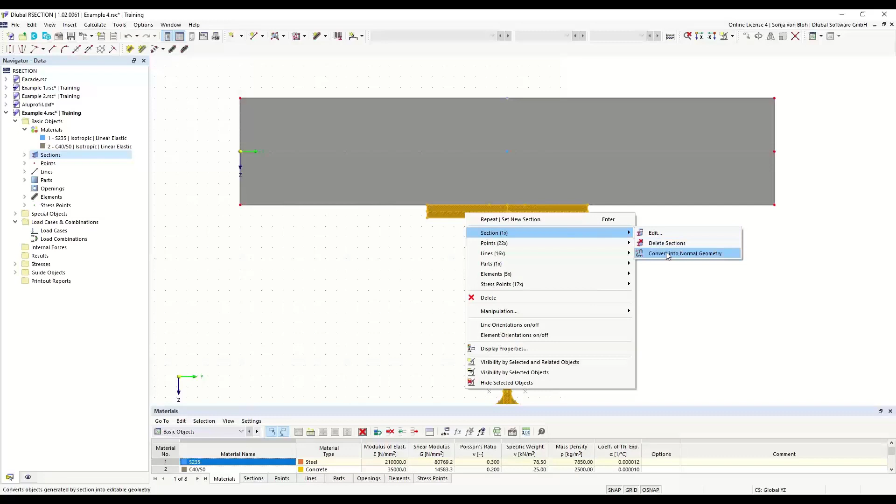Now I have here 2 lines. This is not so good for the calculation. That's why I right-click on the section and I convert it into normal geometry. And I have also here the 2 lines, but it's possible here with this function, connect lines and elements. I go here by these lines, right-click, and then you will see we have only 1 line.

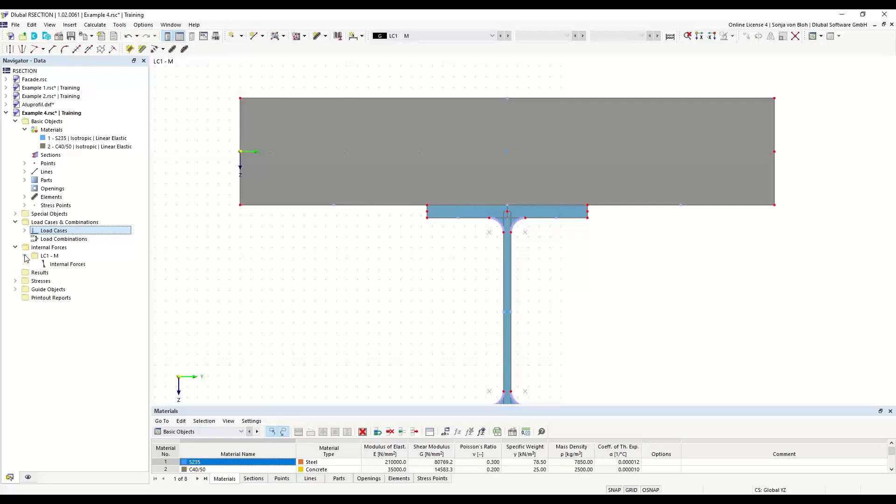Then I create a load case for the bending moment. Here, new load case. I name it M. Click on OK, and I define an internal force of 100 kilonewton meters, and click on OK, and then I can calculate this cross-section,

and in the section properties you can see that the ideal section properties will be calculated. The reference material is always the first material that I've defined. Here in this case, the S235. And you can also see here the geometric sectional area.

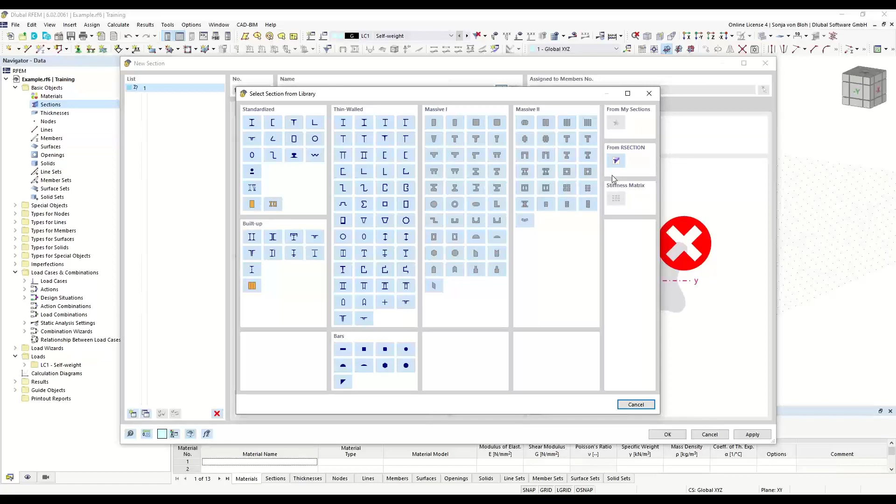I would also like to show you how to import the cross-section into RFEM. To do this, I save this cross-section, and now I open RFEM, and to import the cross-section, I go here to the navigator data again and right-click on the section, new section. Then I open the section library, and here we have a button for importing cross-sections made with RSECTION.

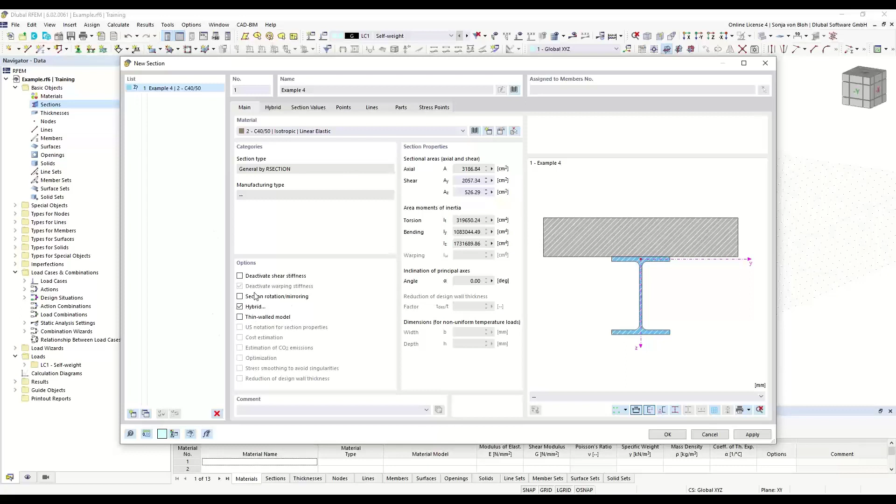So I click on this button. Then I choose here my cross-section that I've created and click on Open. Now this cross-section will be imported, and you see that this checkbox hybrid is activated. And here in the tab hybrid, you see the material assignment. You can see here now for part number 2, the material S235 is assigned. Then I click here on OK. It's also possible to change it here if you want to.

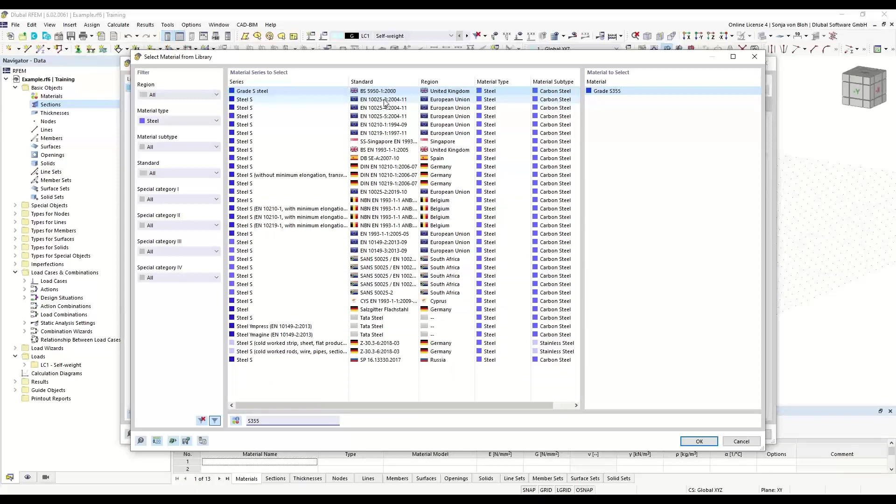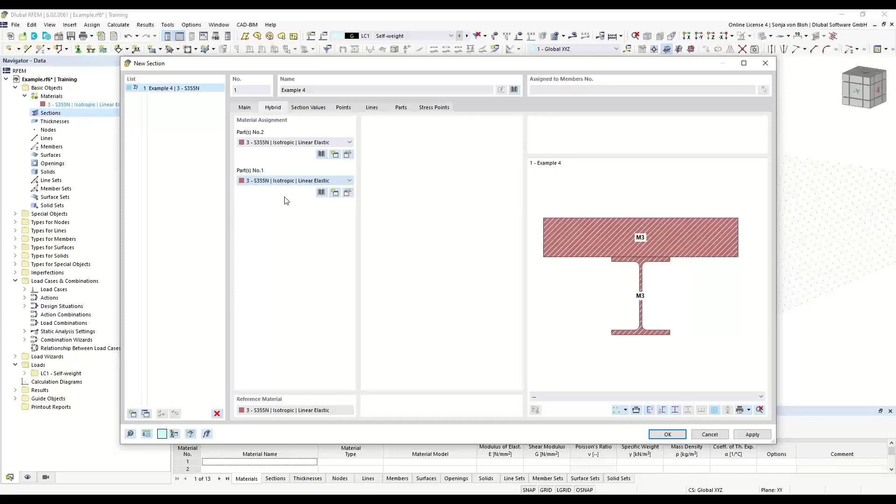And it's also possible here to choose a different material. You can create it also here in this dialog. Maybe here an S355. And here, maybe it's better here to use this material. And here, different material. Sorry. I have made a mistake. I choose here the concrete material.

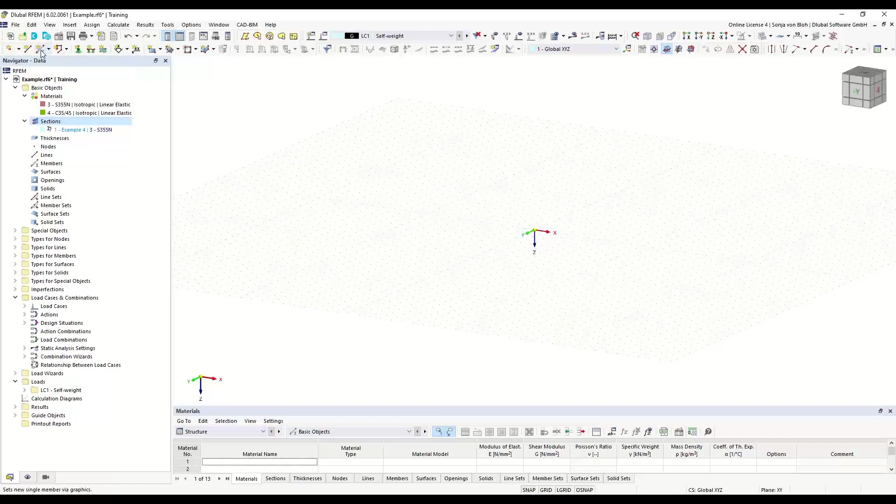Okay. So you see, you can change it by your needs, and it's now possible to use this cross-section in a member. For this, I create a new member. Here I can choose the section. And now I've created that member with this cross-section.

With this example, I have come to the end of the training. It was taught how you can create general cross-sections with graphic functions, how you can add cross-section parts to database sections and create sections based on DXF import.